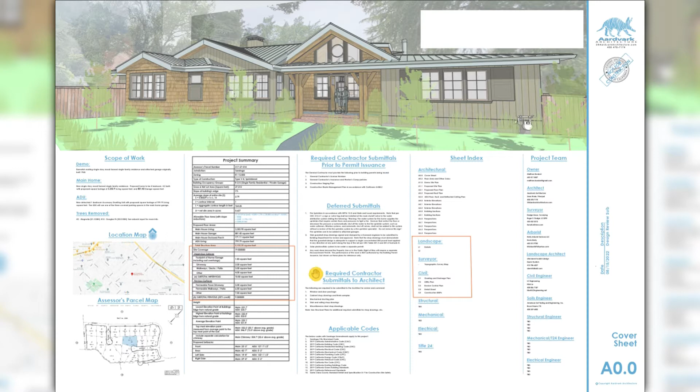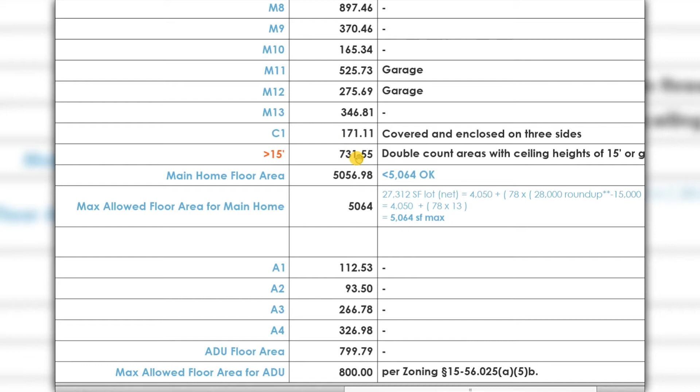So what we're seeing here is a lot of tabulation is required by the city. I'm not going to bore you with all the details here, but this does break down for you all the square footages that we're building. Don't be alarmed here when you see that the main home floor area is 5,057 square feet out of the 5,064 that you're allowed to build. Remember, this is double counting the covered front porch and double counting any area that's taller than 15 feet, which we do have quite a bit of in your home, but we're coming in perfectly under the wire.

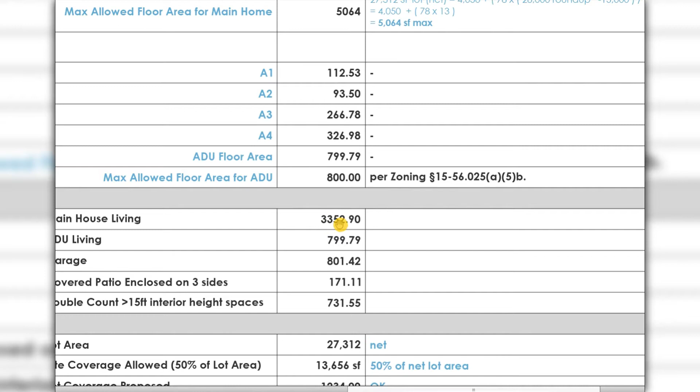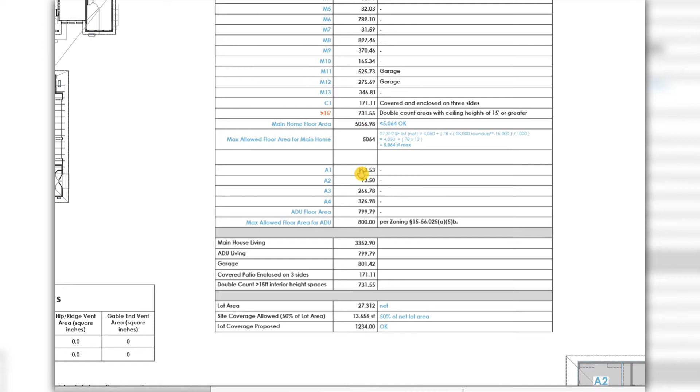For your home, that's really more about 3,353 square feet. I might call that 3,400, just rounding up. But that's really the square footage of your living area, the ADU living area, the garage area here. So don't be too alarmed by that 5,000 square foot number. I'm really proud about how tightly we dialed in this design to stay under the wire. I'm really proud of that.

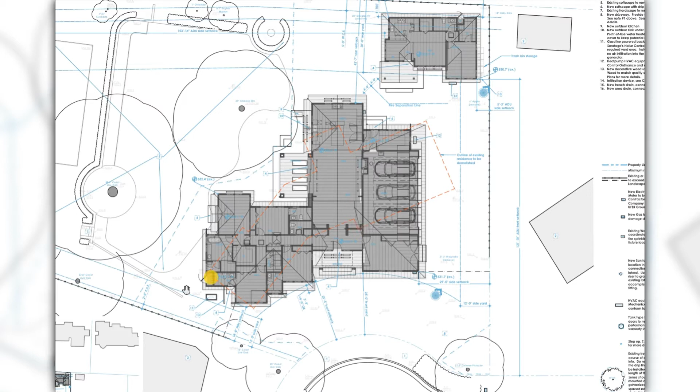I think this is a really clean site plan. I think it's ready to share with the city. I think it does a great job of demonstrating, though, that the house may be big and tall here in the middle, we're so far removed from the neighbors, and we're providing a lot of really low roof areas towards the two neighboring structures near you. I'm really happy with this. This is taking a while to render, but this is a cleaner, zoomed in version of the main home floor plan. I don't think anything really has changed much here.

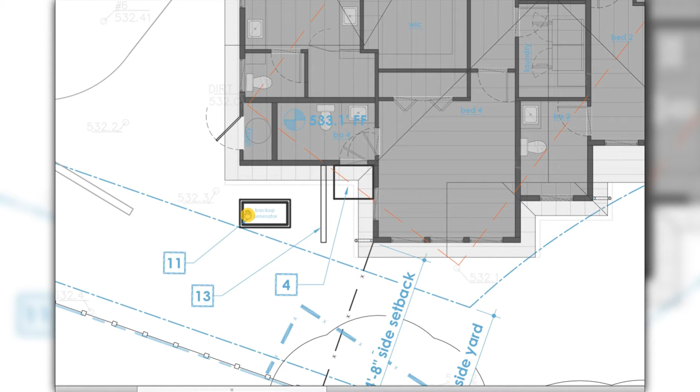Actually, I do want to go back to the site plan and just touch again on what I've settled on for the equipment, both the backup generator and the heat pump for the main home. So the backup generator will go here along this secondary bedroom, just outside of the bathroom here. So the bathroom has an operable door. That is somewhat a concern, so we'll have to make sure that we spec proper weather sealing, really seal that door up nice and tight.

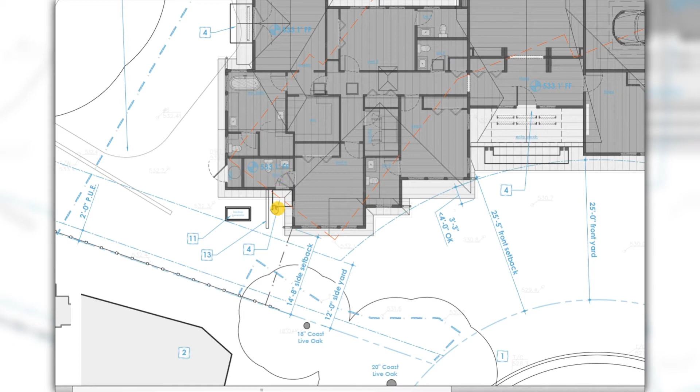But then I'd also want to build, or maybe get your landscape architect's help designing, a screen wall here, a bit of fencing that could both shield the door a little bit and visually screen the view of this equipment from this bedroom window and from that bathroom area. So let me know if you feel the same way as I do, that this is the right spot for that.

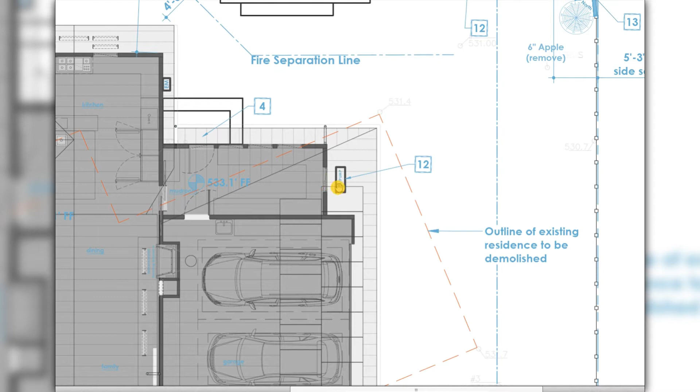So then looking over here, I think I would reserve this spot here by the garage and mudroom for the heat pump. So shifting the heat pump from this location down to this location. This would be a fixed window; it doesn't have to be. It could be an operable window. There's no exhaust or gas being burned here, so this could be operable, but maybe just go fixed. A fixed window will perform better acoustically than any operable window would.

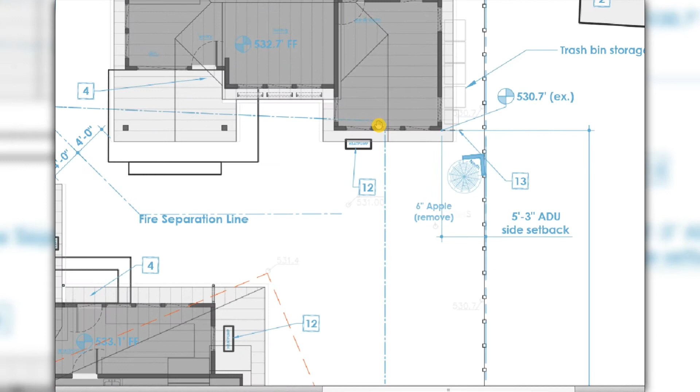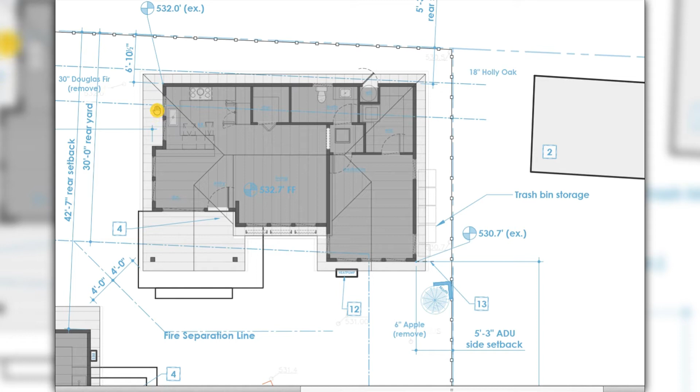And we have the two heat pumps here, one for the ADU and one for the main home, paired right here at the end of the driveway. And again, the heat pump here is within the buildable area, so it's outside of the 12-foot side setback, and it's also outside of the 30-foot rear setback, so it just fits perfectly right here. I know I was contemplating putting it right here before, but the city has definitely clarified for me that they don't allow any noise-making outside equipment to be within the setbacks. So, sorry for showing that the first time.

All right, let's see. Okay, so the floor plan, we talked about the equipment. I think that's the big change there. The roof plan is new for you guys, so you haven't seen the roof plan yet. I think it's a very clean looking, very beautiful roof plan. It's got a lot of different slopes, and it's certainly got some complexity at certain areas, but I think given the size of the home, I'm really, really proud of this roof plan, how clean it looks from the exterior

elevations, and how, for the most part, all of this bedroom and bathroom wing here, and all of the garage, and even a good portion of the front porch and this covered porch here are all underneath the 18-foot height limit. And we're only breaking the 18-foot height limit just for a little bit, just here at the ridge, just to bring in those taller volumes that you wanted, those opportunities for a lot more glass. I just think it's really great.

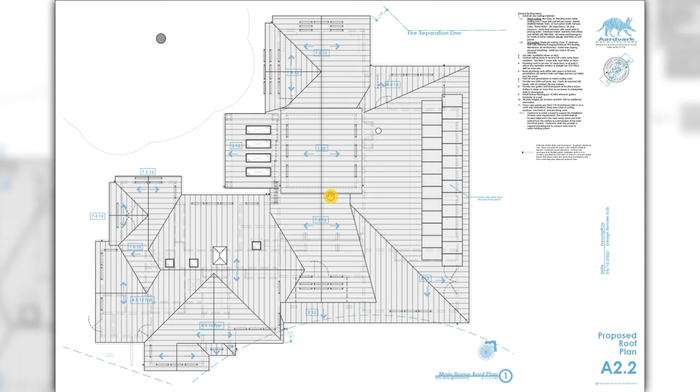Let's see here. So the next sheet here, we're going to jump in number a little bit because I'm reserving room for a couple other sheets for the main home that will come after the design review process. But here is now a floor plan, roof plan, future reflected ceiling plan area for your ADU. So we're seeing now the floor plan, roof plan side by side, which I think is pretty nice. Given the size of this home, just under 800 square feet, I think it fits nicely on one sheet. One design change here, it's not a big deal, but I thought as I was looking at your home and going through, you know what, sorry, I want to back up.

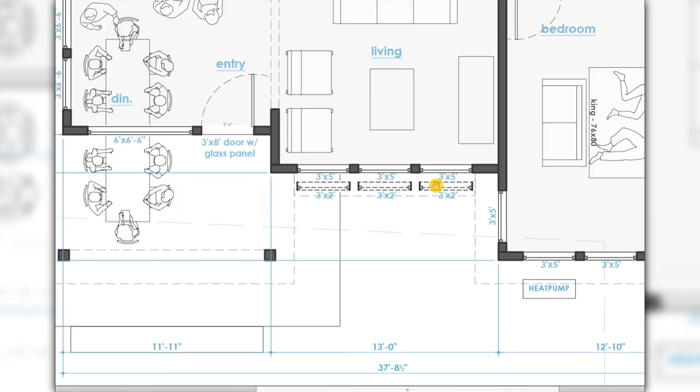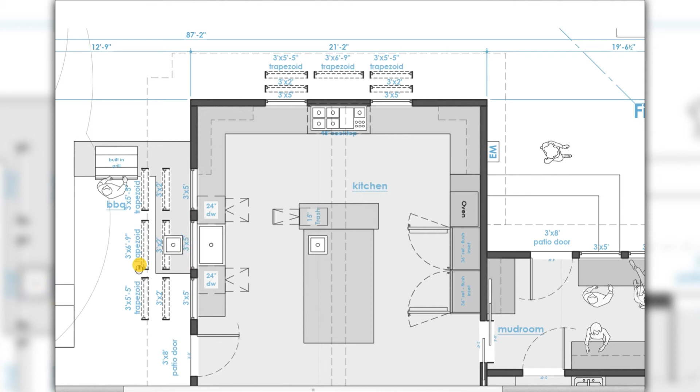One nice thing about the floor plan is now that we're zoomed in a little bit more, I've gone ahead and added the size of every window to the plans here. So even for, let's say, the more complicated window arrangements, like at the cooktop and kitchen, it may look a little bit odd, but I've basically popped these windows out of the wall to show there's a second row and a third row of windows above these windows here. So it may look a little bit unconventional graphically, but with this in hand, you could share this floor plan with a couple window vendors, and I can introduce you to them, and they can start to price out the window package for you.

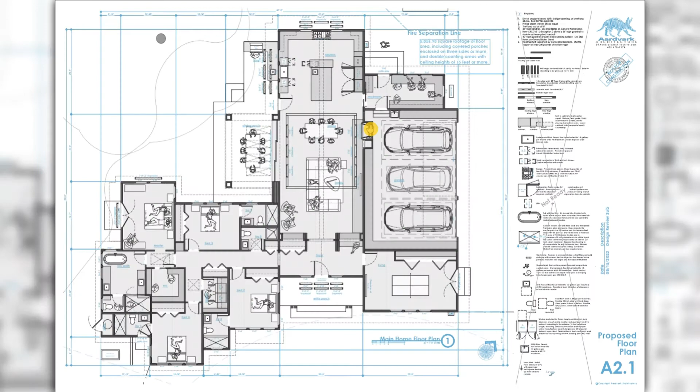The windows are going to be one of the most expensive things that you're going to be purchasing and supplying for this project. And that's true for any project. Windows are expensive. Your project, given the sheer number of them and the size of some of them, I think it'd be a great thing for you to get comfortable with the cost of windows and the different manufacturers and product lines that are out there. So take this to a showroom and start playing around and handling the different windows and get a sense for the exact product line and the exact dollar amount that you'll have to contribute for those windows. But that's showing up both on the floor plan here and on the ADU plan.

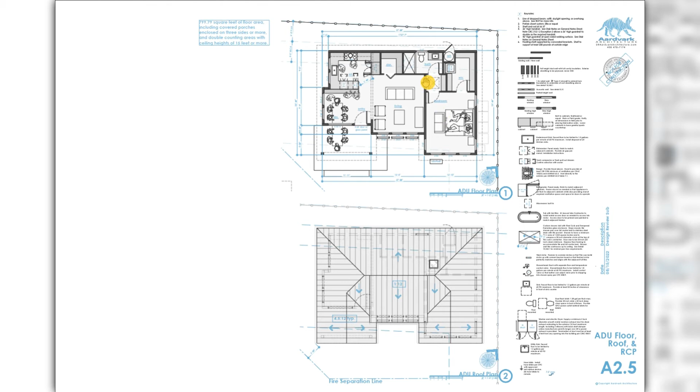But the thing I wanted to talk about too, of course, was adding the skylight here. So do let me know how you guys feel about this added skylight here for the vestibule. You won't see it from the driveway, it's on the back side of the roof, but I think it brings in some natural light in this needed area here to brighten up this inner core to benefit both the bedroom with borrowed light and the living room with some borrowed light. So again, let me know how you guys feel about that.

Okay, so 10 minutes in and we're finally getting to something new here, and this is the 2D elevation sheets for your 3D home. I've only been giving you guys the 3D fly arounds. Well, finally here we can have a flattened 2D view of the home for you guys to see with that new color palette that we picked. So nothing here should look too alarming.

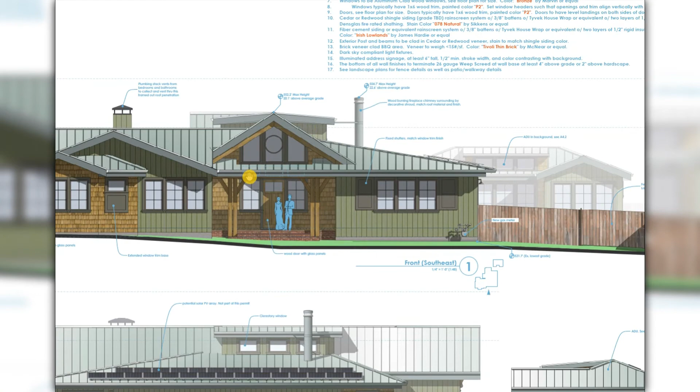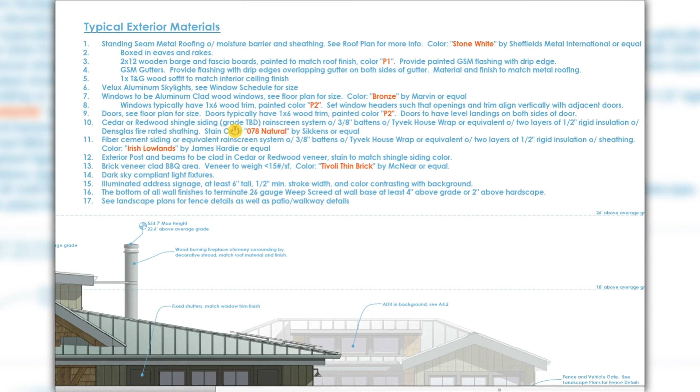I hope you love the way this looks, but I want to point out that I am calling out the materials with a little bit more specificity than before. For example, I'm calling out the standing seam metal roofing color, the window color, even the color of the shingles. I'm calling out the stain color for the cedar redwood shingles, the pre-colored material from James Hardie for the board and batten siding.

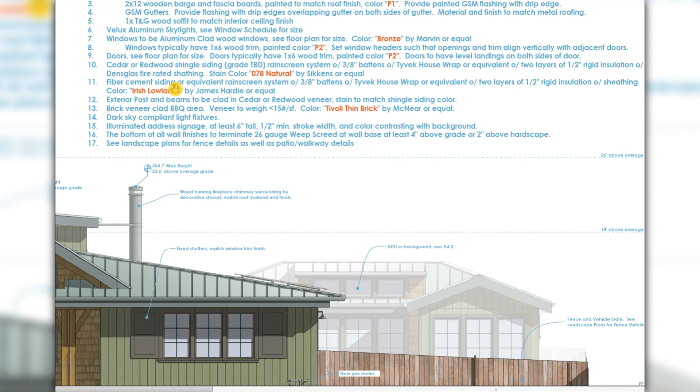I picked Irish Lowlands for now, and I'll be giving you guys a separate PDF that shows screenshots of all these different materials and colors in action. But yeah, they're reflected here in the model. I think it's great. If we want to take a little more time to finesse and fine tune the colors, I think that's fine too. But I'm really happy with this.

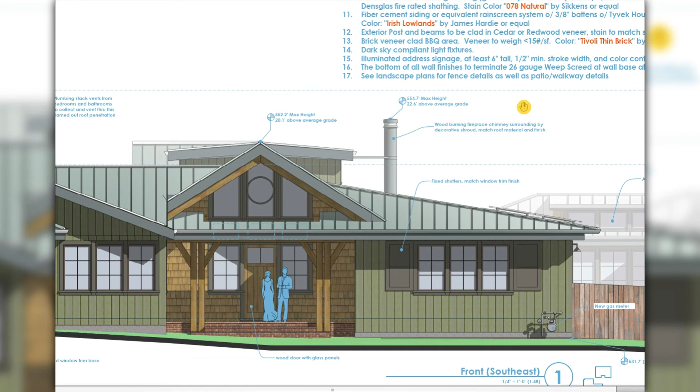I know I was happy with every color scheme we've looked at, including the first one with the darker blue. But this is a very attractive color scheme, a very attractive home. So here's elevation of the rear of the home, elevation of the left side.

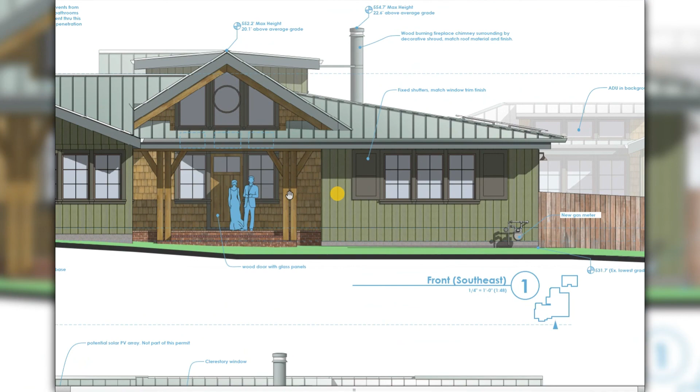Another new element that I've included here is, like I've done on the front elevation with shutters and some skirts below windows, I've decided that I wanted to try and bridge, connect the master bathroom windows to the window at the toilet area with another bit of trim.

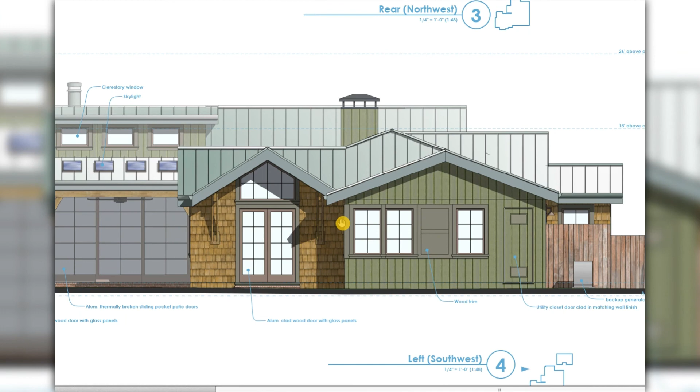The space between is just a little bit wider than a one window module, but I still think that this looks nice, and it's a nice way to say this is all part of the master bathroom, especially when we turn the corner. It shows up a little better in the 3D views that you'll see at the end of this PDF. So let me know what you think about this addition as well. And here's that skylight showing up at the backside of the ADU roof.

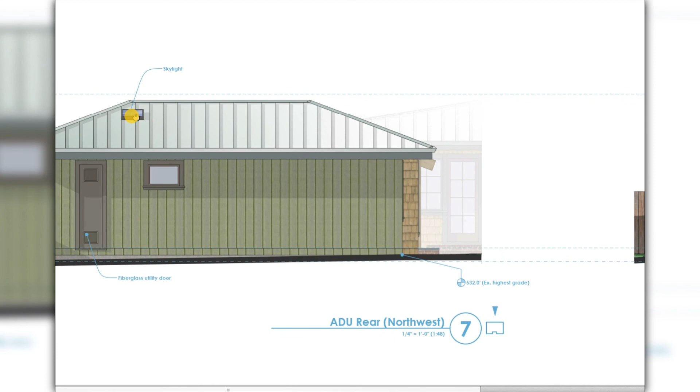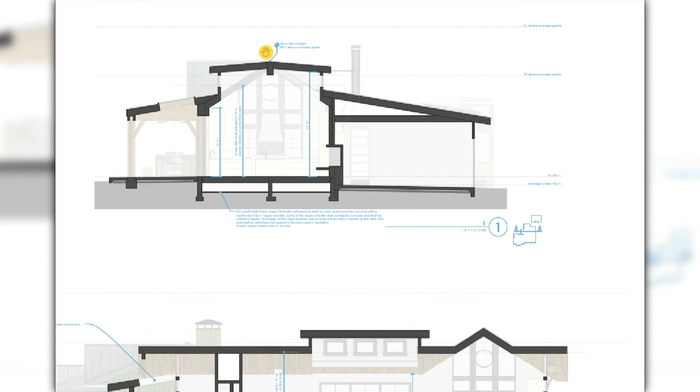A new plan for you guys, or a new sheet type, would be these building sections that you're seeing here. This is required by the city of Saratoga for the initial planning design review set to demonstrate sort of the maximum height condition areas. So I've cut these sections through the pop-up area happening at the great room.

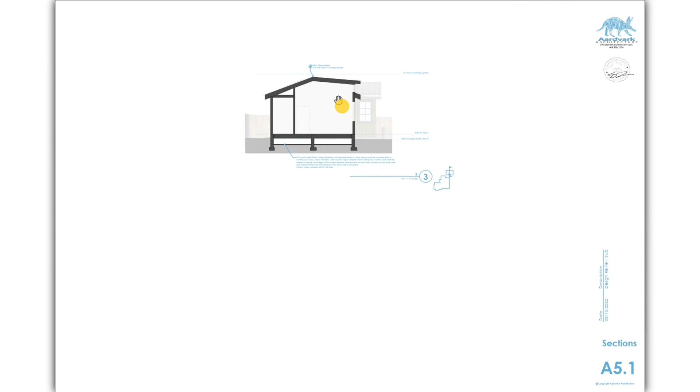I'll develop a lot more sections like this when we get ready to go in for the building permit set, but for the initial design review set, I think just these 2 through the main home and 1 through the ADU is sufficient for now.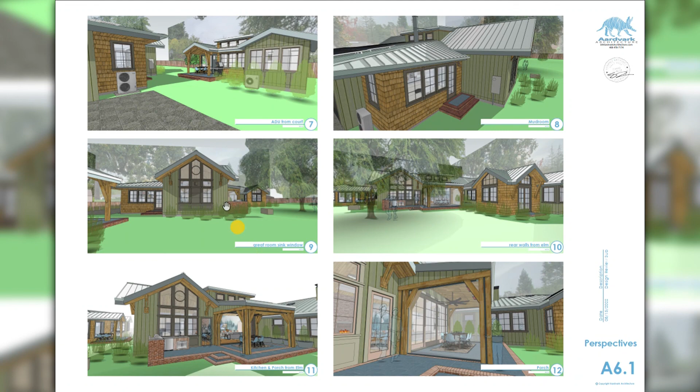Last but not least, we come to the perspective sheets. You've seen these before, and of course you're familiar with the 3D model, so I don't think there's anything too new to see here. Yeah, nothing new here other than the final locations for the appliances maybe, and of course the color scheme again.

Well guys, I am really eager to hear your thoughts on this draft plan set, and of course those few design issues that I raised.